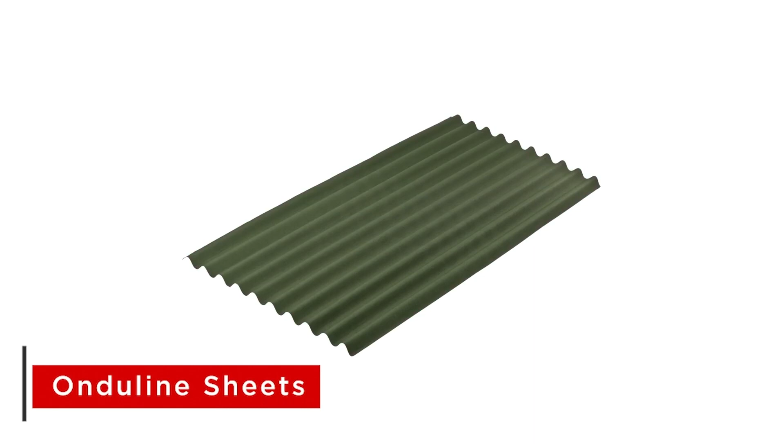Onduline sheets, made by the worldwide leader in light roofing, has been protecting lives and investments for over 75 years. Onduline is Filipinos' reliable roof partner in any season. It can withstand typhoons and wind speeds up to 260 kilometers per hour. It reduces noise on heavy rains, giving you a comfortable and quieter home, conducive for working and learning. A non-ferrous product that can resist corrosion, making it 100% rust-free.

Suitable for coastal homes and establishments. A weatherproof protection made with global standards. Uncompromised quality that values and protects your investment. Have a better sleep at night knowing that you are protected. For your roofing needs, Onduline, on duty.

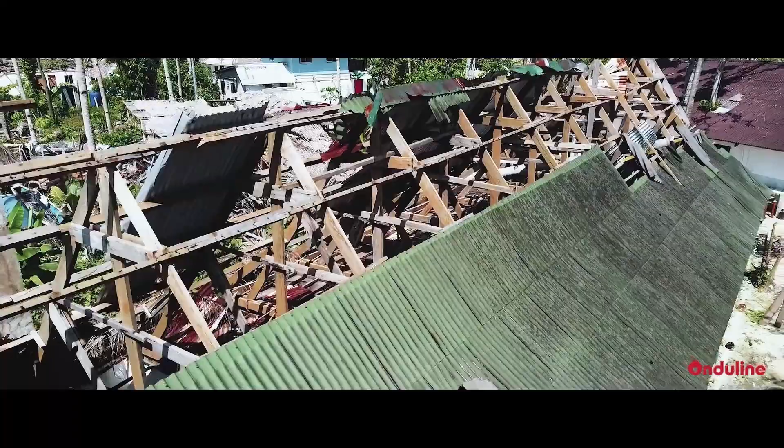And when we came back from the evacuation center, we came back here, and the only roof still alive was Onduline. So it's a no-brainer. If you want to rebuild, we go for Onduline for that.

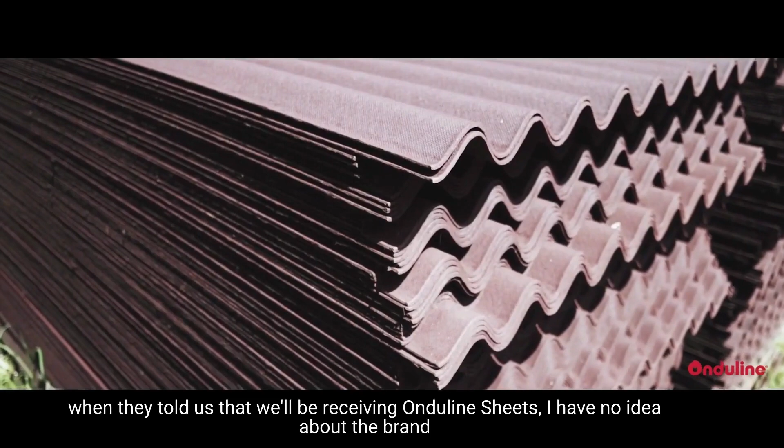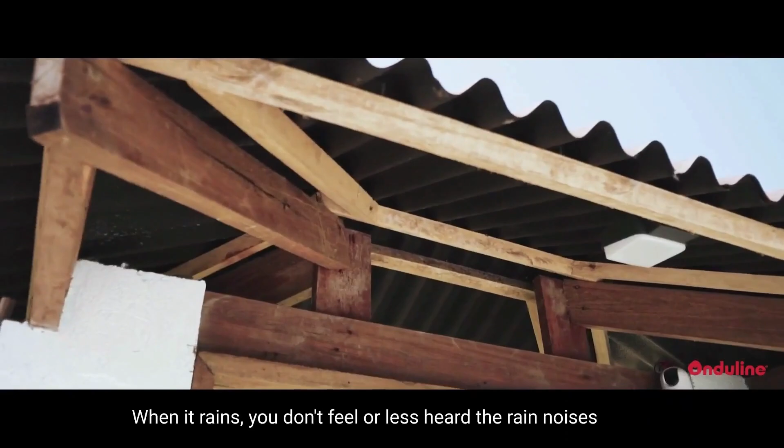It's easy to install, it's fast to install, there's no corrosion. When it rains, you don't hear the rain underneath. When it's very hot, you don't feel the heat underneath. So it has a lot of characteristics that are better than any other roof sheets.

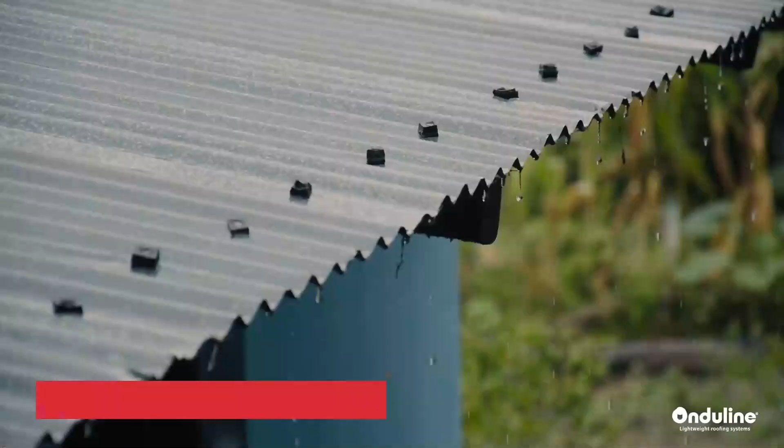Understanding the double roofing system. Water roof leaking is a very common problem in the Philippines due to its weather. Several coastal structures along a 37,000 kilometer coastline are prone to rust, and the roof material being used is mostly metal. Onduline develops a concept to address the issue of changing your whole roof after an unfortunate situation.

With this system, you don't need to dismantle your old roof that was damaged by unfortunate events. Onduline lightweight roofing solutions can be installed on top of it using the double roofing system. With its cost-efficiency, time-saving, unique, rust-free, and wind resistance features, double roofing is the expert solution. This property installed our double roofing system with less disturbance to its workers.

Upgrading your roof should not be costly with Onduline's double roofing. For your roofing needs, Onduline, on duty. Onduline Lightweight Roofing Systems. Welcome to Onduline Double Roofing instructional video using Onduline corrugated sheet. Have you heard about double roofing? Now you do. This video will give you a step-by-step on how the system works.

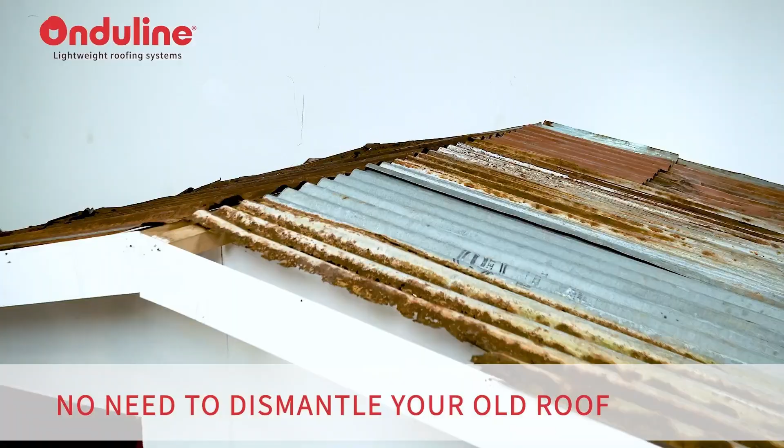Double roofing is an innovative concept that addresses the issue of changing your whole roof. With this system, you don't need to dismantle your old roof. But how does this double roofing work?

You will need the following tools: saw, electric screwdriver, measuring tape, a pen, cutter, and rivet.

Safety is essential in the workplace. A complete safety uniform is usually recommended.

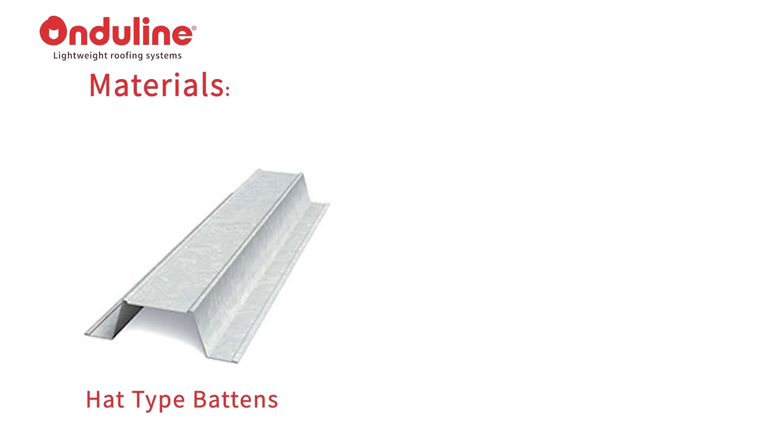Materials: hat-type battens, tech screw, Onduband, Onduline speedy screw, Onduline corrugated sheet. Secure checklist on different areas such as roof rust level, structure, purlin type, and termite penetration.

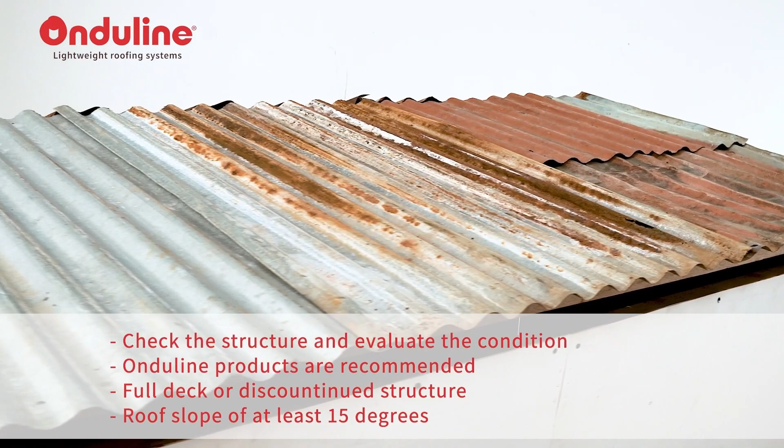How bad is the leaking? Before getting started, check the structure and evaluate the condition of the roof, trusses, and existing purlin. Onduline products are recommended for either full deck or discontinued structure, with a roof slope of at least 15 degrees.

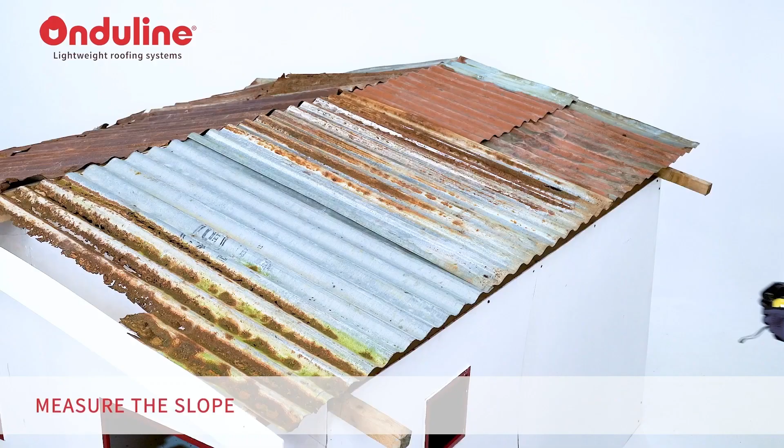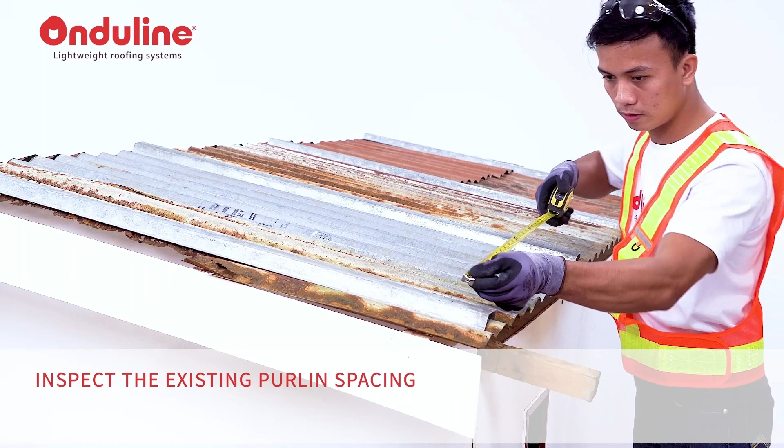Measure the slope. Inspect the existing purlin spacing. If the roof is 5 to 10 degrees, use 24 centimeter purlin spacing. If the roof is 10 degrees or above, use 45 centimeter purlin spacing.

Install main support battens vertical to existing purlins using a 2.5 size tech screw, depending on the actual existing GI profile. Use ordinary screw or verify if it's a wood or steel frame.

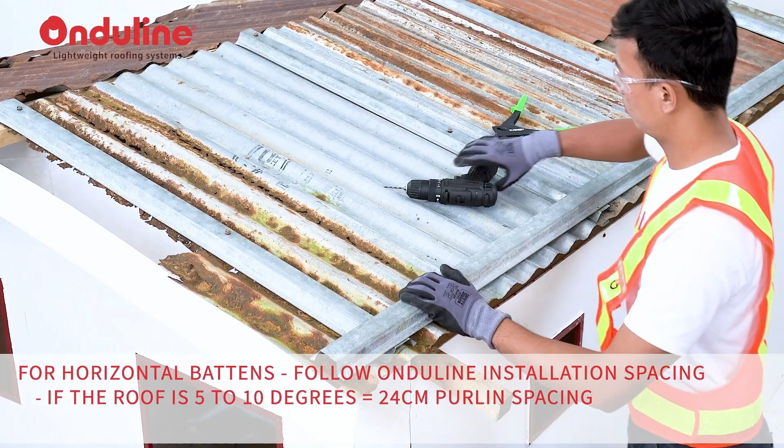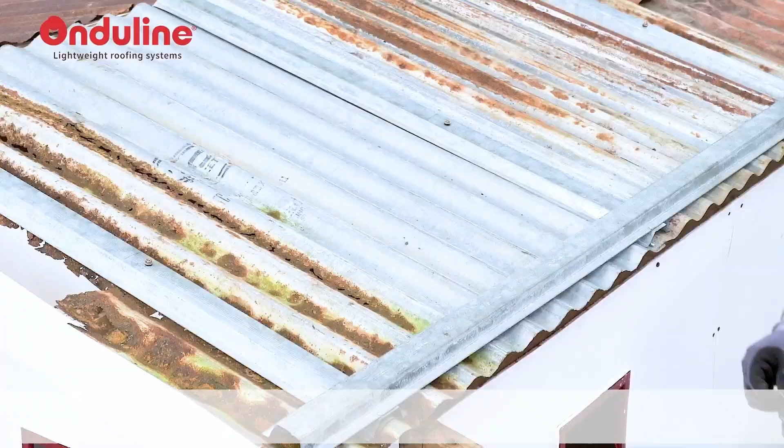For horizontal battens, if the roof is 5 to 10 degrees, use 24 cm purlin spacing. If the roof is 10 degrees or above, use 45 cm purlin spacing. Use a rivet gun to attach the horizontal battens, following Onduline installation spacing.

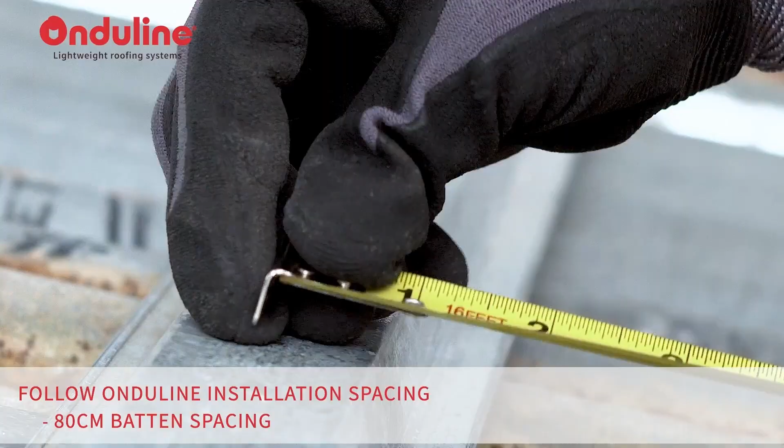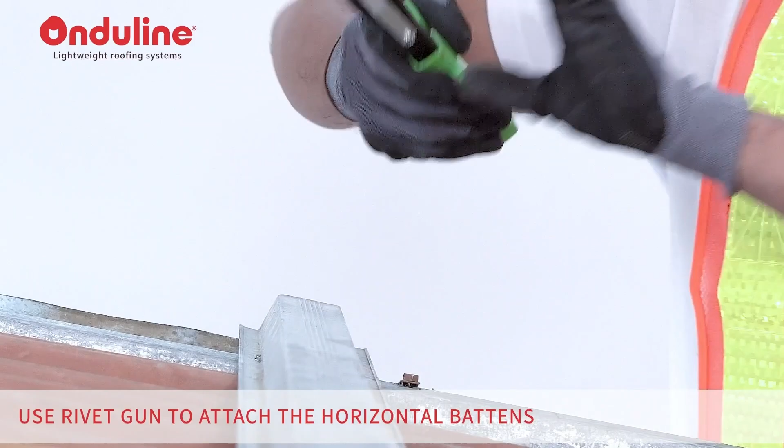Use a rivet gun to attach the horizontal battens. Start fixing the Onduline sheet.

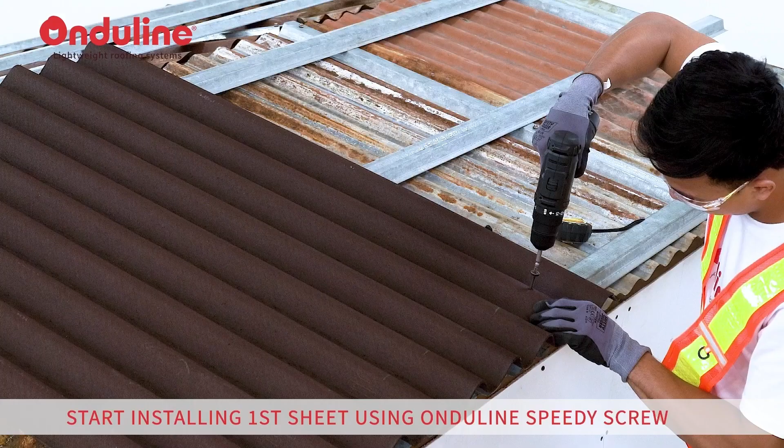Use a string line or measuring tape as a guide at a distance of 7 cm maximum overhang. Customers may opt to install rubber fillers. Start installing the first sheet using Onduline speedy screw.

For 5 to 10 degrees, or 24 cm purlin spacing, use 20 pieces of 8x4x4x4 screws. Side overlap: 2 corrugations. Top overlap: 32 cm sheets. First and second purlin spacing should be 20 centimeters.

For 10 degrees and up, use 45 cm purlin spacing and 14 pieces of 5x3x3x3 screws. Side overlap: 1 corrugation. Top overlap: 20 centimeters.

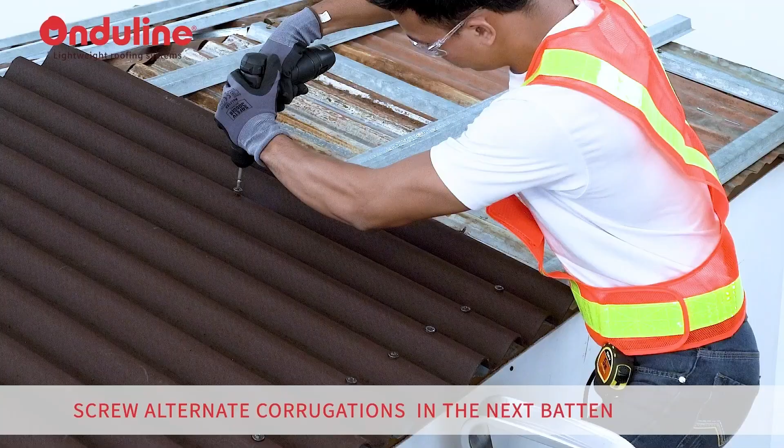Screw alternate corrugations in the next batten. Fix sheets at the opposite ends of the roof from prevailing winds.

Check side overlapping: for 5 to 10 degrees or 24 cm purlin spacing, use 20 pieces of 8x4x4x4 screws with a side overlap of 2 corrugations. For 10 degrees and up to 45 cm purlin spacing, use 14 pieces of 5x3x3x3 screws with a side overlap of 1 corrugation.

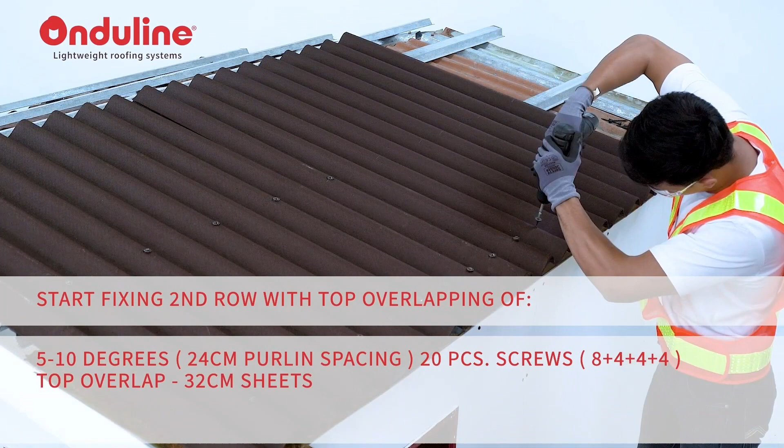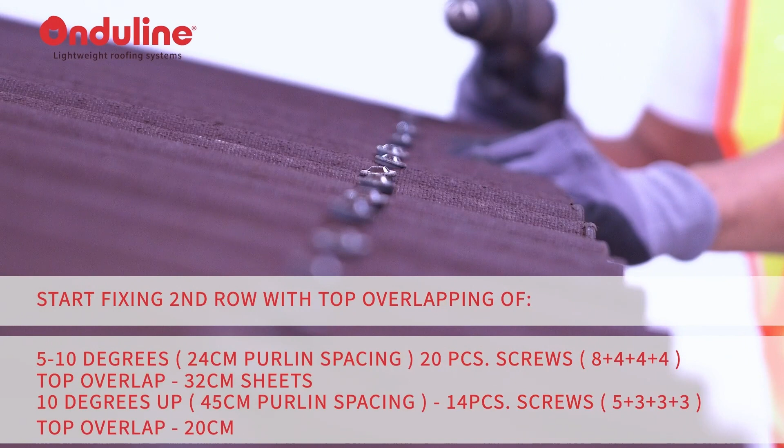Start fixing the second row with top overlapping. For 5 to 10 degrees, 24 cm purlin spacing, use 20 pieces of 8x4x4x4 screws with a top overlap of 32 cm sheets. For 10 degrees and up, or 45 cm purlin spacing, use 14 pieces of 5x3x3x3 screws with a top overlap of 20 centimeters.

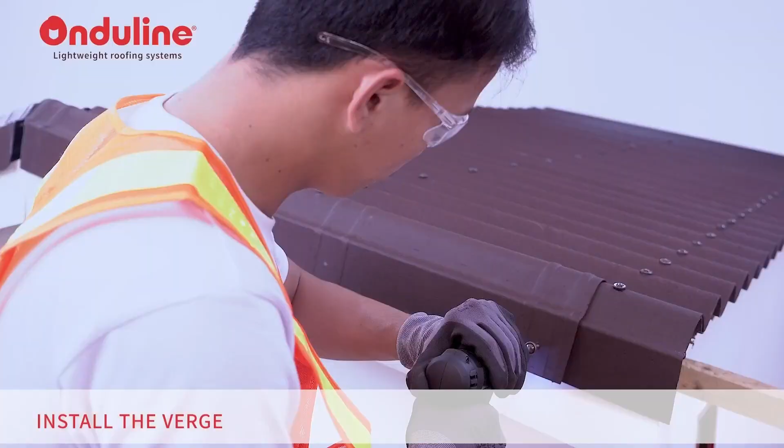Install the verge. Attach Onduband before installing the ridge.

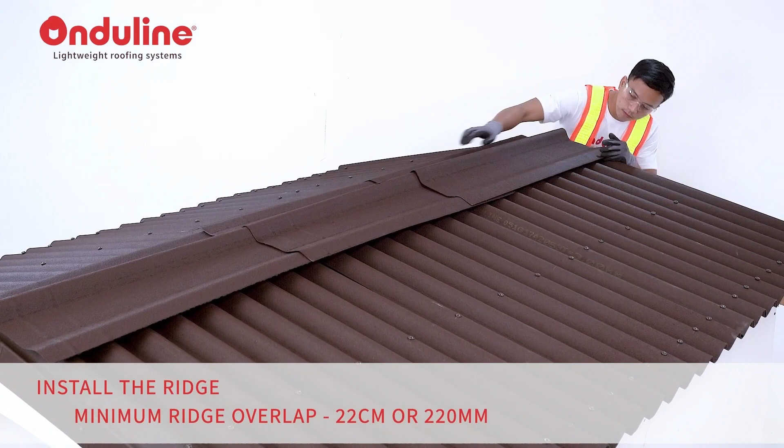Install the ridge. Minimum ridge overlap is 22 centimeters or 220 millimeters. Check for any imperfections.

That's how you easily install Onduline corrugated sheets using our double roofing system. For cost-efficiency, time-saving, unique, rust-proof, and wind resistance benefits, Double Roofing is the expert solution.

Heavy rain? Introducing Onduline's acoustic performance. With Onduline, we understand everyone's struggle, especially during rainy season. Heavy rain noise can affect your family's mood in a day. Your father can't understand what he's watching, your sister's sleep is disturbed, and you can't hear your mother's voice clearly. Onduline's lightweight roofing solutions are proven to be 4 times quieter than metal sheeting when rain falls on them, giving greater acoustic insulation performance.

With its rain noise reduction, your family can now enjoy watching TV, better sleeping, and more focus on studying. Check out our product by visiting our website.

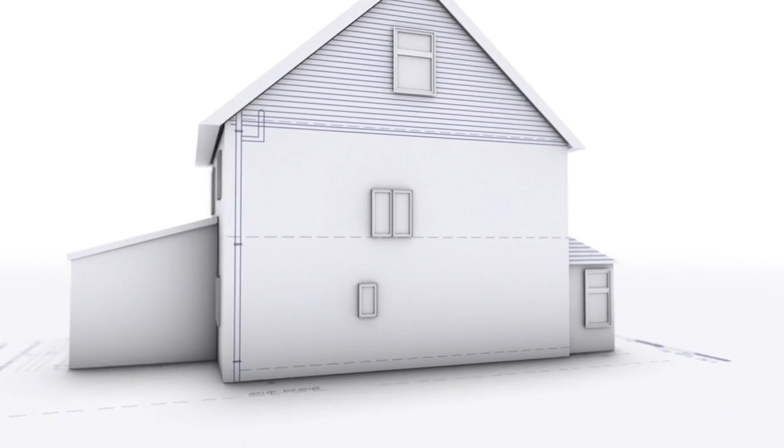When adding an extension to your home, planning is everything. It's important to consider how light will enter the space. Many people think bifold doors will bring in enough daylight, but it's often not the case. That's because an extension moves the light source further away from the original building, so daylight can't reach very far into your home.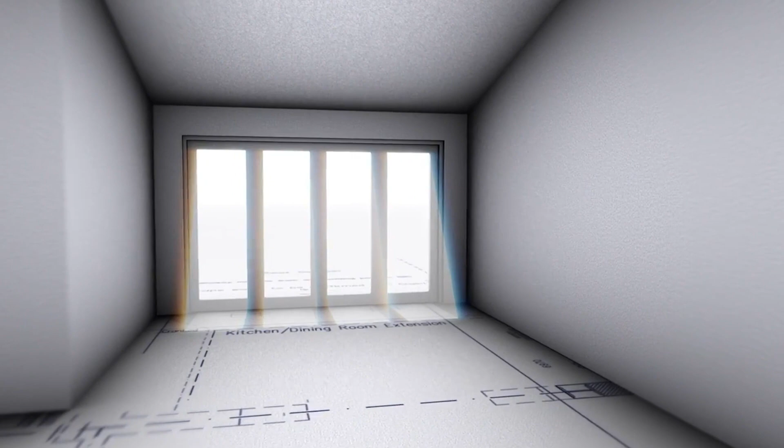The solution? Velux roof windows. They can bring in twice as much light as vertical windows of the same size, allowing light to penetrate deeper into your home. Here's an example: it's an attractive extension, but it's quite dull. Look what happens when we add 2 roof windows—the space immediately becomes brighter. But choose the optimal solution, and the room is completely transformed. It's light, bright, welcoming.

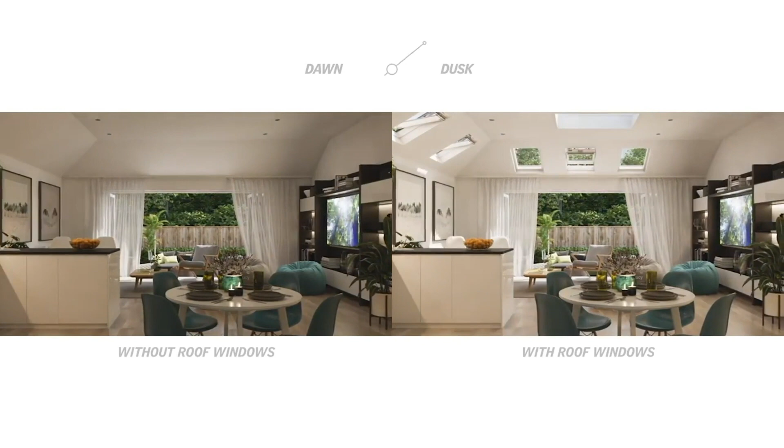Ideally, your combined roof and vertical glazing should make up the equivalent of 15 to 20% of the whole room's floor space. It's also important to think about how light will enter the space throughout the day. Get your vertical windows and Velux roof windows working together, and you'll create the optimum level of light in your extension. From dawn to dusk, they maximize the available daylight.

If your extension is north-facing, Velux roof windows are even more vital. In some cases, they're the only way to get sun shining directly into the room, like in this extension here.

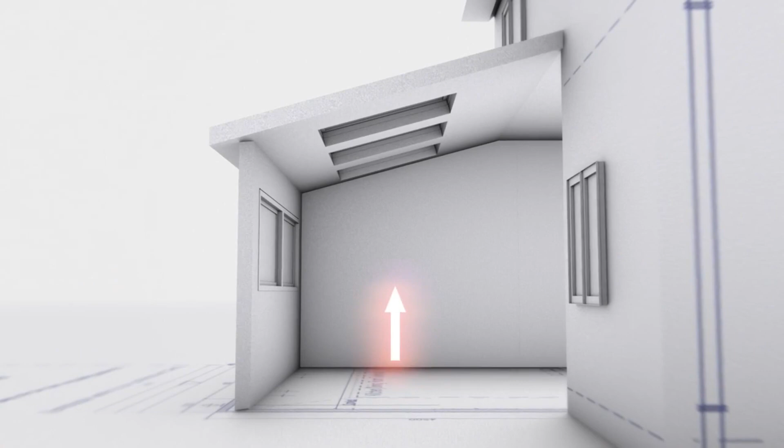But Velux roof windows aren't just about daylight. They bring fresh air into a space too, through a process called stack ventilation. As we know, heat rises, so warm air naturally moves upwards in a room.

When a vertical window is open, only a small amount of air can circulate. But add an open Velux roof window into the mix, and the flow of cool air pushes the warm air up and outwards, recycling the air in the room in seconds. Ideal for kitchen extensions, so cooking smells don't hang around.

7 out of 10 extensions don't have roof windows, so most extensions are missing out on more daylight, more fresh air, and more wow factor.

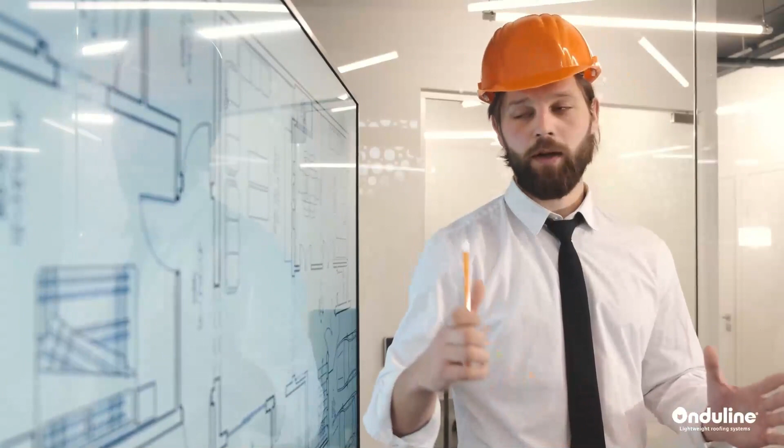Understanding the double roofing system. Water roof leaking is a very common problem in the Philippines due to its weather. Several coastal structures in a 37,000 kilometers coastline are prone to rust, and the roof material being used is mostly metal.

Onduline develops a concept to address the issue of changing your whole roof after an unfortunate situation. With this system, you don't need to dismantle your old roof that was damaged by unfortunate events. Onduline lightweight roofing solutions can be installed at the top of it using the double roofing system. With its cost-efficient, time-saving, unique, rust-free, and wind resistance, double roofing is the solution expert.

This property installed our double roofing system with less disturbance to its workers. Upgrading your roof should not be costly with Onduline's double roofing. For your roofing needs, Onduline on duty.

And now here's how to join our double roofing, doble saya. Go to the website flash on your screens or visit the Onduline Philippines Facebook page and click the link and readily provide the following information: your full name, email address, phone number, salesperson contact number, signed purchase order processed by Onduline Philippines with client and or contractor name on it, and of course provide any government ID and wait for Onduline's representative to send you an acknowledgement of your submission.

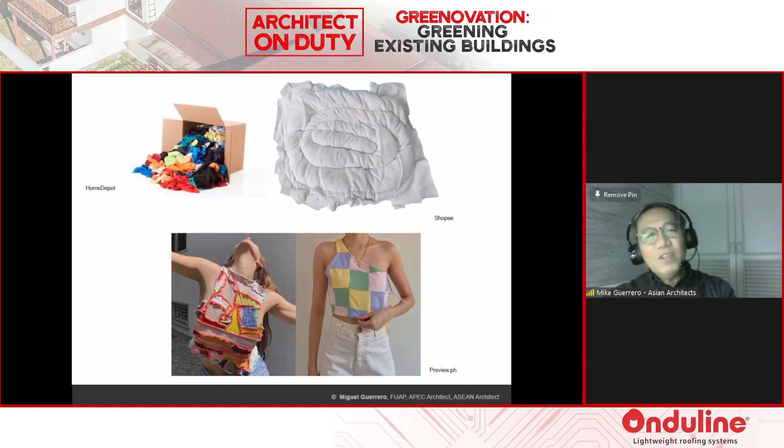And sometimes even if the clothes cease to be clothes, they're actually even recycled further. For example, they're made into rugs, sometimes even reprocessed rugs like that one little rug there, which is sewn together. And some creative people are actually putting all of these little patches together and actually creating fashion in themselves.

There's a type of fashion which, because of my generation - I belong to the older generation - I really never understood. You buy brand new pants, but they actually have holes. Every time I see some of my staff or younger people wearing them, I tell them, wow, that's cool, that's cross-ventilated pants. But even if it's already damaged, quote unquote, in the beginning, it is still recycled.

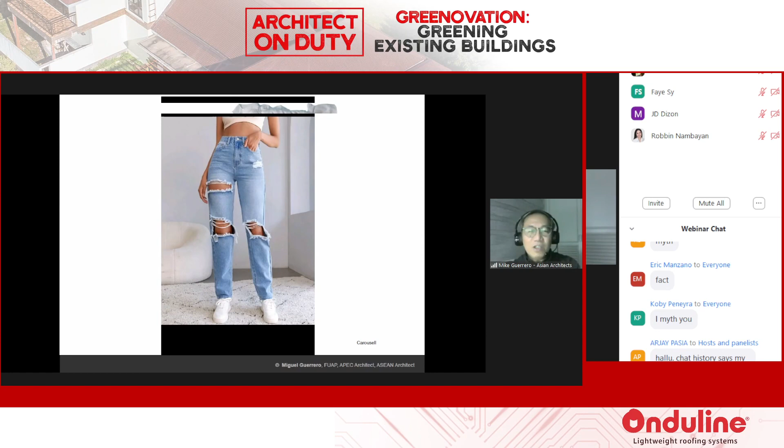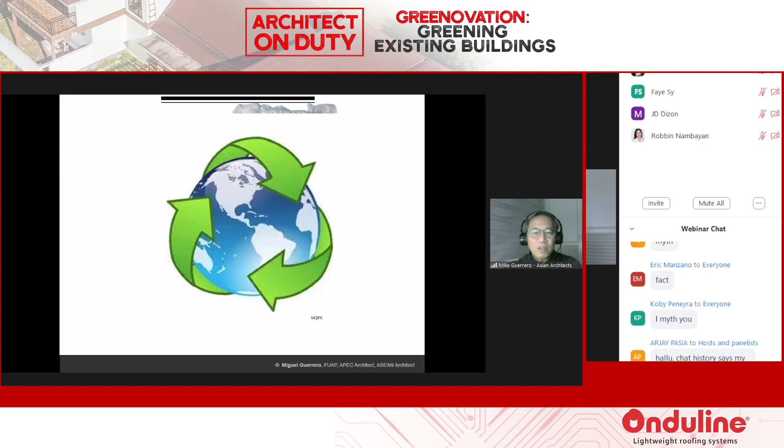So the clothing industry somehow has found a way to recycle that raw material, which is made into textile, which is made into clothes, which can be sold in different mediums, or even made into rags or trapo, etc. They have learned. Now, what about our industry?

Our industry produces buildings, homes, structures, etc. We build so many of them. Of course, the timeline is a bit longer than clothes, but then at some point, those buildings either go out of fashion, they get destroyed, they get damaged, and what are we going to do with them? Are we just going to demolish them?

The architectural industry or construction industry has created so many names for what to do with existing buildings - renovation, repurposing, adaptive reuse, etc. I thought that's a bit confusing for the public, so I decided to restructure what to do with existing buildings in terms of its function.

So there are four possibilities. If you have an existing building, one, you can extend the use of the building - repair, restore, conserve. In other words, if the building is working this way, we just make sure that we constantly keep it in good use, in good repair, so that it can actually continue being used for what it is originally used for.

Second, we can upgrade that building. Maybe the technology is already so old, so maybe we start renovating, retrofitting, remodeling that building so that it sort of keeps up with the times, it keeps up with technology.

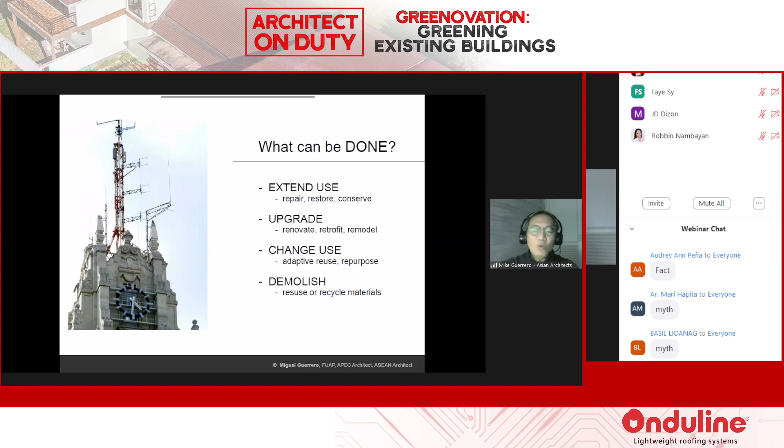We could also change the use of the building. If the building is an office building, can we reuse it as a school building? If it is a warehouse, can we make it a hotel? So that's adaptive reuse or repurposing.

And if really the building cannot be saved, then we are forced to demolish the building. But try to see if you can actually reuse or recycle the materials in that building.

So today, we go to three points I'll share with you. First step is the assessment. In other words, when you have an existing building, before you touch it, before you modify it, you have to assess that building - get details, get data, get information, which will determine whether you can actually proceed with the renovation or not.

Second is greenovation. I'm going to share with you six steps in which you can actually go through so that you can change that building which you're trying to touch or renovate into a green building. If you're going to touch a building, why don't you make it a green building anyway?

And third, design tips. Having gone through the process of renovation or greenovation, what would you do?

And what could you learn from that process so that when you design from the very beginning, we actually design to facilitate the renovation or retrofitting of that building in the future.

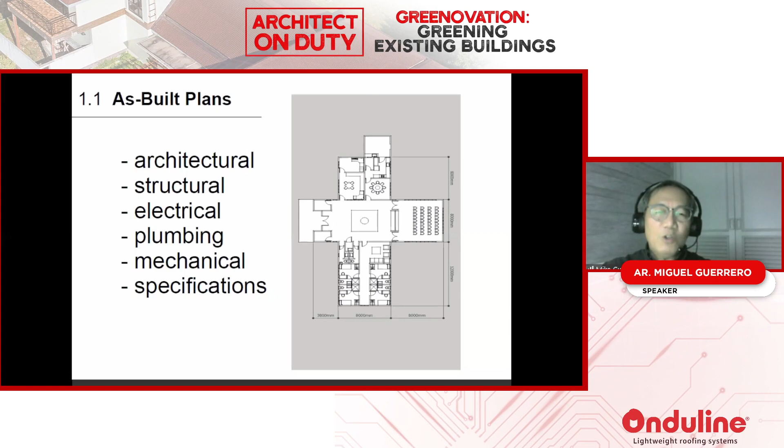Now sometimes these are not accurate, or for some strange reason the plans don't exist. Then you will have to actually do your best to measure up the building, try to check out all the items in it, and make or create the plan so you can use those plans to start your renovation process.

Second is an energy and cost audit. Ask for the building's electrical consumption, get the Meralco bill, find out the monthly consumption of electricity in this building and the equivalent cost. Second, ask for the water bill, check the water consumption and cost of this building. Third, what is the cost of maintenance of the equipment? The air cons, the elevators, everything—try to find out how much they are spending per year to maintain this equipment.

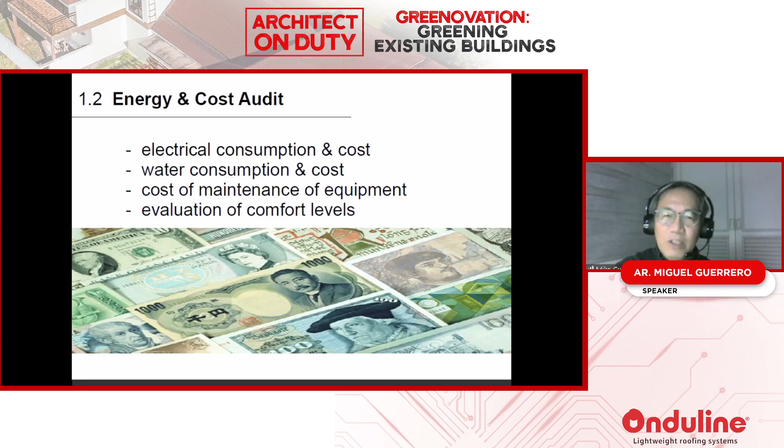And then evaluate the comfort levels. You can pass around a little survey or ask people how comfortable they are in the areas where they work or live, depending on the type of building you're going to renovate. This is important because it becomes a benchmark which in the future can determine whether it is worthwhile renovating the building based on these parameters or not.

The third step is doing a building survey. So we go there and check the building. First, climate and site data: where is the orientation of the building, where is north, south, east, west? What is the average temperature, the mean temperature, the highs and lows? Rainfall in the area of that building.

This will help you if you want to decide to harvest rainwater. Wind speed and direction, so you might be able to use this wind to flush out the air inside the building. The topography within the grounds of the building, or even around the building, so at least you know which is the high point, which is the low point, where the water is going to move in case there's a typhoon.

Air quality, parts per million—is it polluted or is it safe? The noise, decibel level in the area, vegetation around if existing, and matters like wind affected by adjacent buildings. Because even if there's a certain direction of wind, if there's a building beside it, the wind can actually be deflected by that building.

Then review the building form. What is the surface to volume ratio? In other words, what is the skin of the building? Because if you're going to change the finishes of the building, you have to consider that. What is the glazing ratio? This is known as the percentage of windows to wall, the window-wall ratio in the building. And then, of course, building orientation.

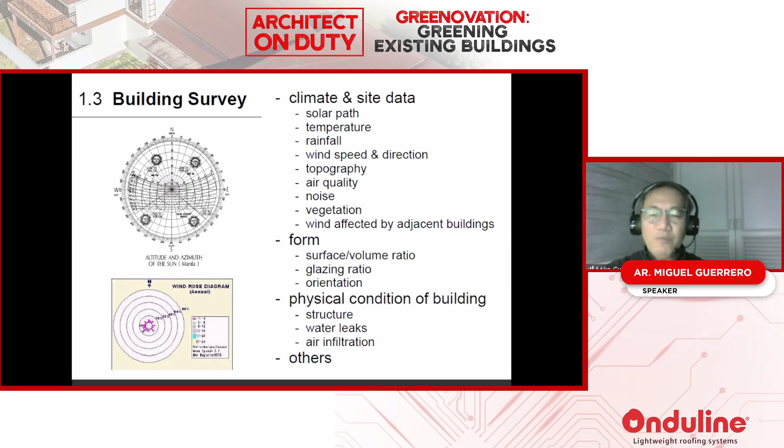Where is it facing? And then finally, check the physical condition of the buildings. How is the structure, is it safe? Are there water leaks, are there air leaks? In other words, maybe it's aircon, but the aircon is actually leaking out of the windows or the doors, or even cracks in the walls, and others, depending on the type of building you're going to renovate.

Fourth is equipment survey. Start reviewing the equipment, check the conditions of the air conditioners, pumps, elevators, escalators, fans, blowers, electrical panels, wires, controls, and others.

Now, don't get shocked, you're not going to do all of this because as an architect, we are not experts in some of these matters. We put together our team of engineers, our electrical engineer, our structural engineer, our plumbing engineer, and they join us to survey the equipment in that building.

Once you've done that, you will be faced with some issues to help you decide whether you should retrofit or not. So why should you retrofit? Is the building decaying? Is it degraded? Maybe it's time to renovate the building.

Is it outdated? Be careful about outdated, because sometimes some buildings are actually classified as historical monuments. You have to be careful about that.

Is the building inefficient in terms of its energy usage, its water usage, its space usage? Is it unreliable? Is it unhealthy? Are people getting sick there? Is it too dark? Is there going to be a change of occupant? Is the building operating at excessive cost?

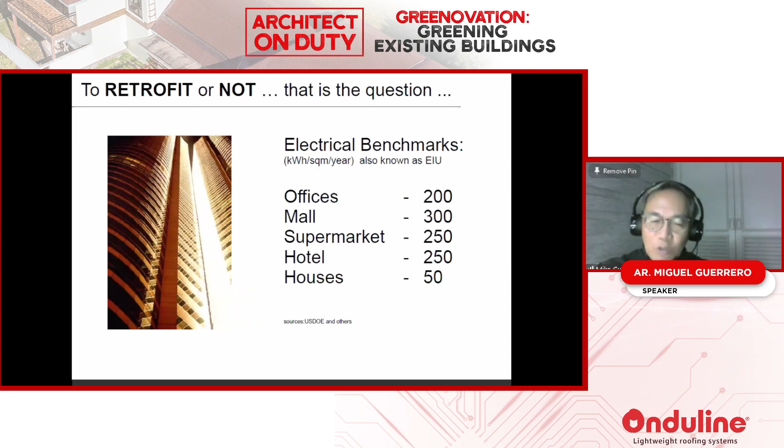Now that I mentioned houses, maybe later on you can do a little homework. When you go home, try to see, get your own Meralco bill. Try to find out what is the kilowatt hours per year, and what is the area of your house. Divide it and see, are you going to be above 50 or below 50? If you're going to be above 50, it means maybe your house is not that energy efficient and you have to look into it. Of course, if it's below 50, congratulations.

Now, what is the advantage of retrofitting? First of all, it's much, much lower capital cost than building a new building. It has a shorter time for completion because even in the most extreme case of retrofitting, which means taking out all the walls, all the windows, all the electrical, all the plumbing, and you just leave practically the building structure, which is the columns, the beams, and the slabs, you're actually starting already with a structure. That's why the time to complete that building is going to be much shorter.

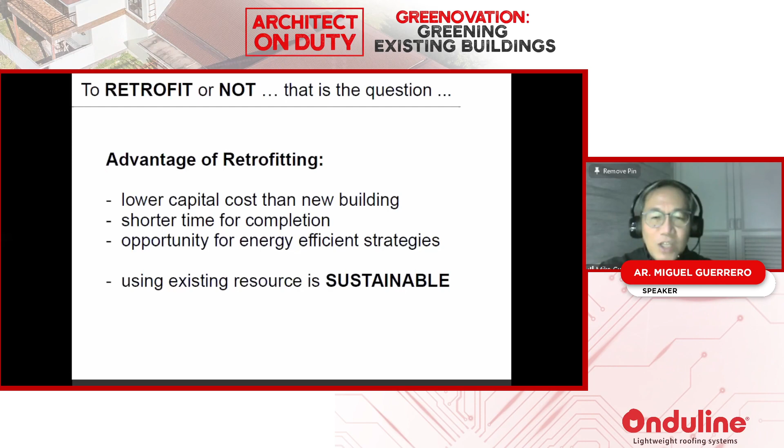And of course, if you're going to touch the building, there's an opportunity for energy efficient strategies. And when green people come together, they always say using an existing resource is sustainable. Because what is sustainability? It's maximizing efficiency of all our resources in the world. And therefore, if a resource is existing and we're using it, then that is a direction towards sustainability.

Now, we don't have to retrofit the whole building in one go. There are retrofitting strategies. One retrofitting strategy is building element life cycles. For example, don't change the air conditioner if it is still running perfectly. Phase it at the end of life of that air conditioner. When that air conditioner is already old and run down, then maybe it's time to change that. So it depends on the life cycle.

You can also retrofit by scale of intervention. For example, you could change just all the lighting. If it is still halogen lights, or maybe you're using CFL, it might be time to move into LED.

Scale of intervention - you can replace the whole air conditioning system, or you can opt to do what I call retrofit packages. For example, one area of the building is very hot, so you look at that whole package. How do you make it more comfortable in that area? Maybe it needs an air conditioning upgrade, maybe you need solar heat control. Look at that solution so that you solve that particular problem in that area. That's what I call a retrofit package.

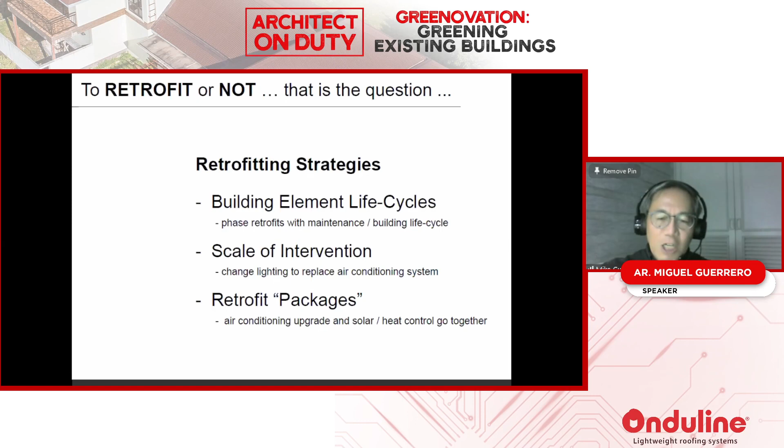So retrofitting doesn't have to be the whole building. It could be based on the building element life cycle, it could be based on the scale of intervention, or it could be based on retrofitting packages.

So let's assume that after you did all your homework and realize okay, this building we can renovate. There are 6 stages in which we can actually address this issue.

First, the building envelope and fenestration - work on that building envelope because that is what controls everything inside. Next, work on the air conditioning and ventilation. Why number 2? Because air conditioning in a normal office building consumes approximately 60% of your electricity. Number 3, lighting - this will consume 20% of the electricity of a typical building. Then look at water, then look at the materials, and then look at the possibility of introducing renewable energy.

So how do you do renovation? First of all, it's not one man's job. You have to put together all your engineers, even the contractors, so that you can discuss. Remember, whenever you start renovating, there are many surprises - I have gone through that many times. Always have an allowance. Tell the owner to have an allowance for things which might pop up in the middle of construction. So get your team together - the owner, the engineers, the designers, even the contractors.

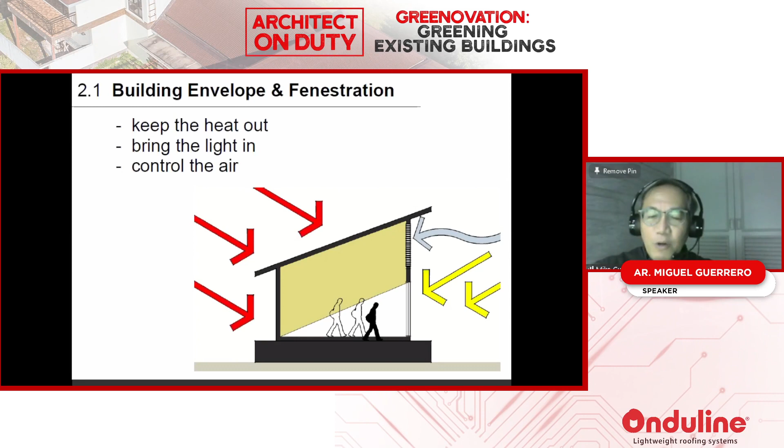So first, the building envelope. What is the function of the building envelope? Keep the heat out, bring the light in, and control the air. That's the function of that building, and therefore we have to study each and every part of those aspects in the building.

For example, if the building is very hot and you have a window facing west - let's assume this is west - you can imagine the sun goes right through this glass window and brings in direct heat into this room. It becomes very hot and uncomfortable for the people, so they use a very powerful air conditioner. What can you do? First, can you put a vertical sunshade outside that window so that it's not hit directly by the sun? It's already shaded.

Can we change the color of this wall to a lighter color? Dark colors absorb heat, lighter colors reject heat. Then the roof is actually hit by the sun, so insulate that roof deck. Earlier in the Onduline videos, you can actually have a double roof - if you have a roof deck, you can put a secondary roof there so that the sun hits that roof first. It may heat up the air inside, but it will no longer transmit heat into the slab or original roof, keeping the interior much cooler.

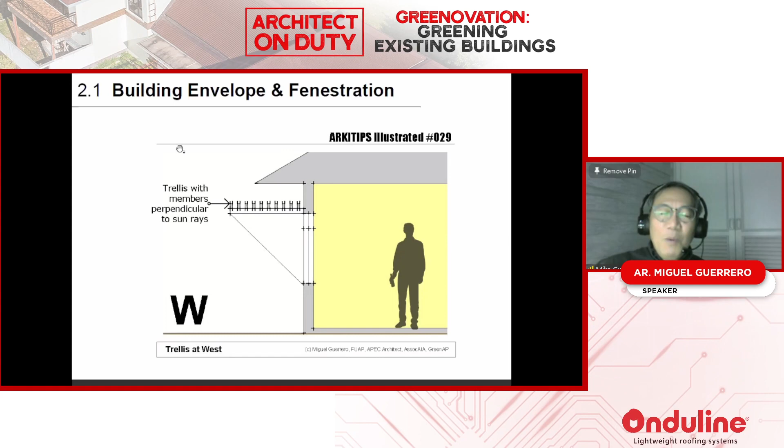What if you have a window facing west, but you have a fantastic sunset view of the sea? I said the other option is to do a trellis solution. In other words, when the sun is low, it will actually be blocked by the trellis, but you'll still have a view of the sunset. So just be creative.

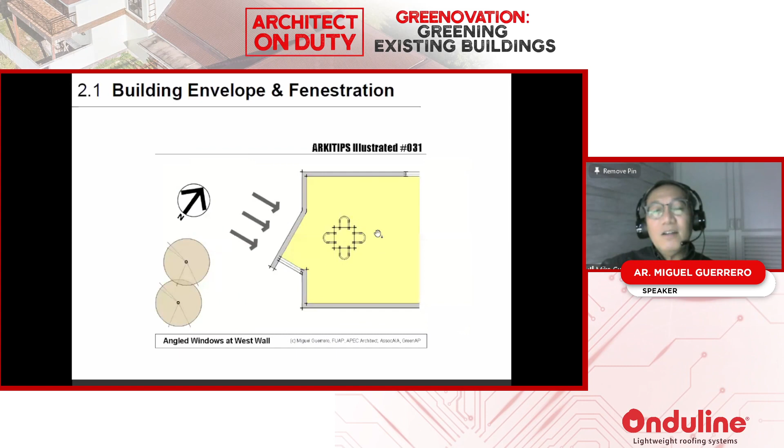In terms of floor plan, if you have your building and west is here, and you put a window there, you're going to have a lot of hot sun coming in. So there's an alternative: push that wall out and put slit windows, maybe floor to ceiling, facing north to south. This room will have lots of natural light without the heat and direct sunlight. If the sun comes at an angle, you can do the same principle, push it out a bit.

Now, air conditioning. When you review air conditioning, first check preventive maintenance, because look at this ducting. The old type of air conditioning was transmitted by ducting, and many times these ductings, especially the joints, have a lot of leaks. So if you're going to retain the existing aircon, try to look into those ducts and make sure there are no leaks.

Next, zone usage. This is very important. If you're going to replan the building, study which parts or functions of the building will need aircon 24 hours, which parts will need it only during the day, which will need it only during the night, etc. If you can do that, you can cluster the areas that use aircon 24 hours into one zone, so they only use that aircon for that area.

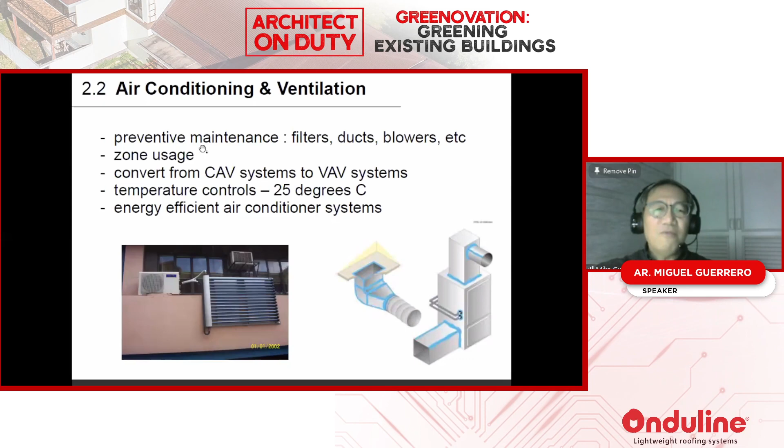And maybe another zone for rooms which only use the aircon during the day, so the aircon will be on only during the day for that area. This saves energy. And of course, look for energy efficient air conditioning systems.

Ceiling fans are becoming very popular. You have these slow moving big air fans which move volumes of air and use very little electricity. Even if you have a smaller, lower powered aircon, it evens out the temperature in the room. So let's look into that first, and see if you can use a combination of fans with air conditioners.

At the same time, try to see if there's a way to bring in some fresh air. That's why earlier I said study the wind movement around the building, so maybe you can have an inlet and an outlet. Try to capture air from the outside, fresh air, at a point where you do not bring in pollution.

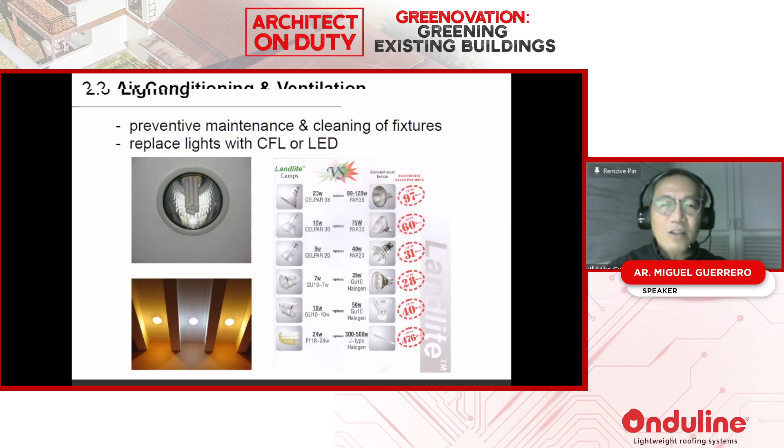Looking at lighting, again, preventive maintenance and cleaning of fixtures, because sometimes the fixtures are just dirty. Try to see how you can do that, and replace lights with CFL or LED. Another small detail, becoming more popular, is to replace switches with motion sensor switches, especially in corridors and storage rooms, so people don't forget to turn off the lights. Also consider the control of lighting, look at this little picture here.

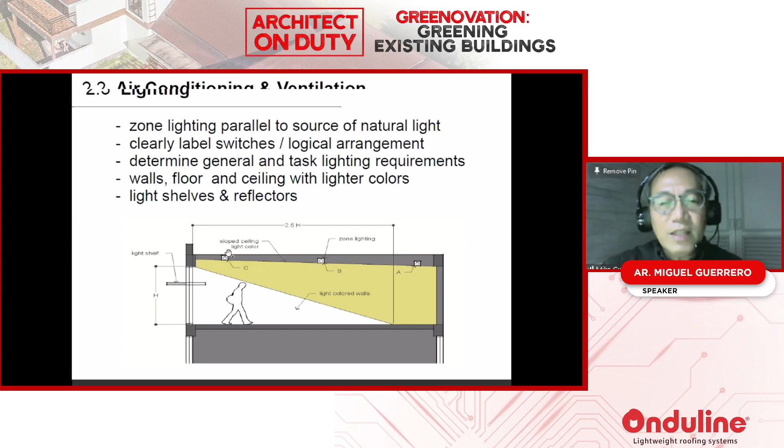You have a window and lights inside the room. Do you think the light beside the window needs to be turned on during the day when you have ample light? Of course not. That's a waste of electricity. Whereas the light farthest from the window probably needs to be on the whole day. So organize your switches based on distance from the window. Lights beside the window should have a separate switch from those farther away, so during the day only the far set is on, and at night you start turning on those closer to the window.

Water study: is it possible to harvest rainwater? No matter how small, you don't have to use it for the whole building, but for selected uses like flushing, cleaning the grounds, or irrigation. At least you save in terms of freshwater supply.

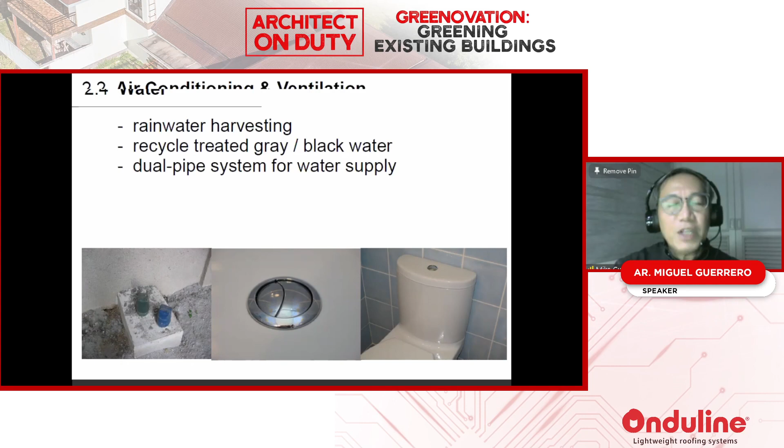Many new buildings now require STPs, so we can reuse the STP water for other non-potable uses in the building.

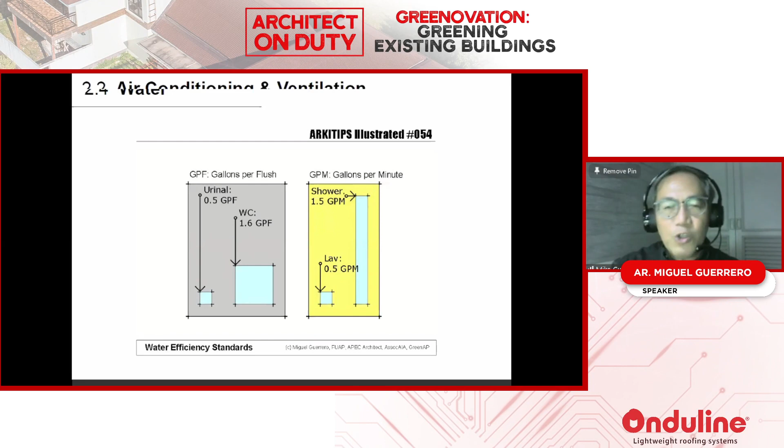Study the fixtures which use the least water. For example, urinals should have no more than 0.5 gallons per flush, water closets no more than 1.6 gallons per flush. For showers and lavatories, look at gallons per minute: lavatory 0.5 gallons per minute, shower 1.5 gallons per minute. Look at the specs of the fixtures you specify and choose those that meet these levels.

Outside the building, you always have catch basins for storm runoff from the downspouts. It goes to the storm drain, into a catch basin, and all the way down to the street, bringing water as quickly and efficiently as possible to the street. The street leads to the lowest portion of the city, causing floods.

A little detail I've done in some renovated projects is to break the floor of the catch basin down to a gravel base. As the water runs through the pipe and lands in the catch basin, a portion ends up going into the ground, bringing less water into the next catch basin.

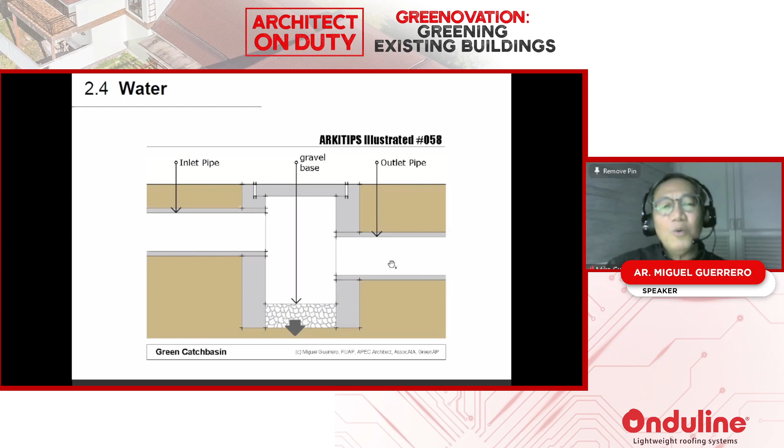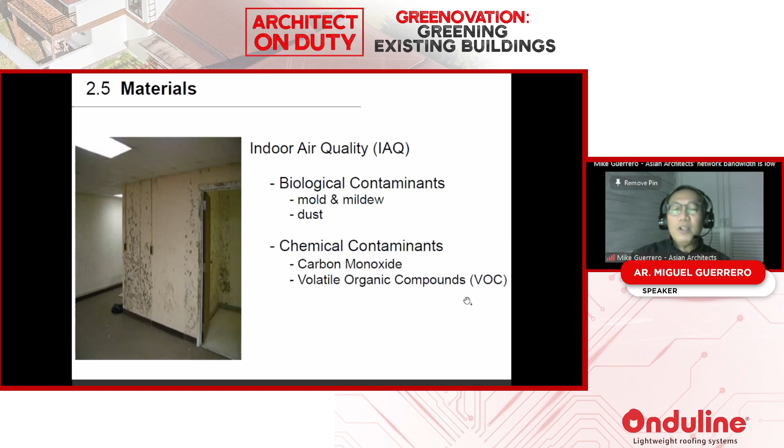You can also look at materials. If you look at this picture, it's nakakadiri -- so much mold, it looks sick actually. So look at materials in which we can avoid biological contaminants. When choosing materials, especially paints and other chemicals, look at VOC, volatile organic compounds, because these can cause sicknesses inside the building.

Look at indoor environmental quality in materials. Check: are the people comfortable? Is it quiet enough for the task they're doing? Is the lighting adequate? And is the indoor air quality clean and less polluted?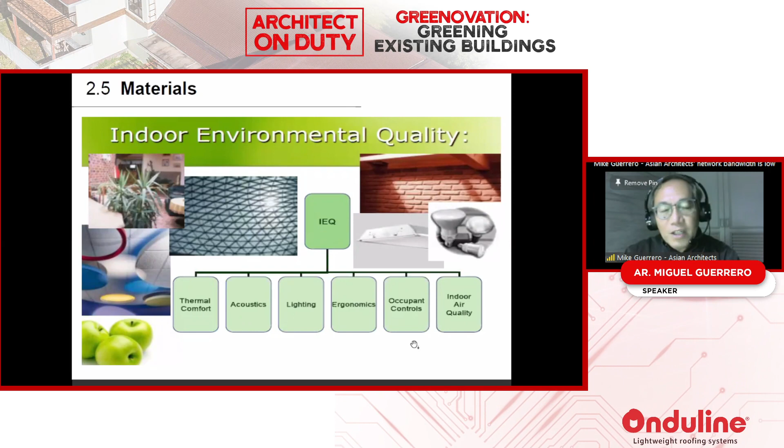Finally, look at possible renewable energy. Solar panels are getting cheaper and cheaper. You don't have to power your whole building with solar panels, but maybe put a few to power lights that are probably on the whole day, like those in the fire escape, which can be tapped to a separate solar panel.

So let's look at design tips. If you were going the other way around, now that we understand how complicated it is to renovate or greenovate a building, what would you do if designing the building from the start, keeping in mind that one day it may be renovated? Consider building envelope, orientation, windows, and pipe chases. The building form should make sure the person inside is comfortable despite variable exterior environments -- hot, raining, cold, etc. -- and we design the envelope to address that.

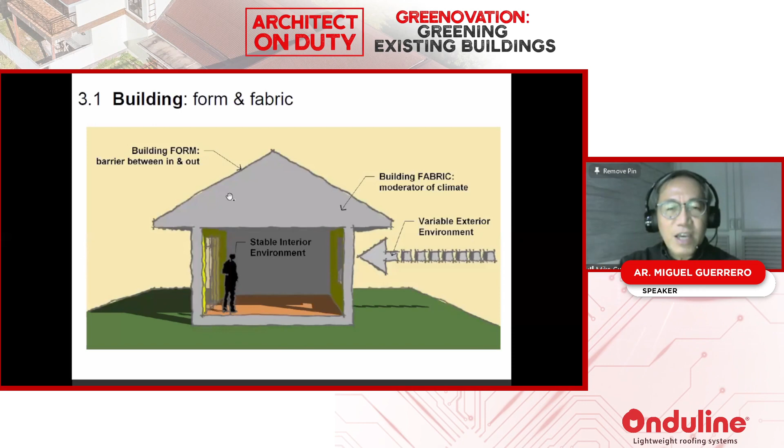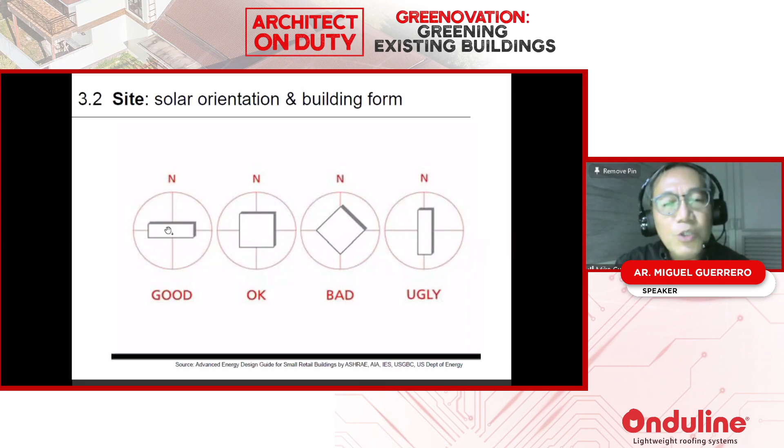In other words, the hot part is putting windows. If north is here, put large windows on the north. If possible, vertical fins on the east and west. And of course, if you have windows to the south, make sure you have a media agua overhang.

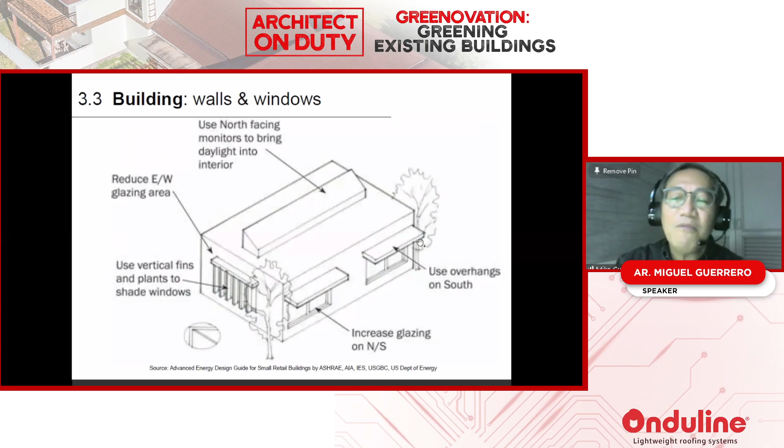So to recap, before you touch any building, do an assessment. Make sure you get the as-built plans, do an energy audit, a building survey, an equipment survey, and this assessment will lead you to make that decision with the owner whether that building can be renovated or not. Then, if it is a go, we can go into the renovation process.

First, look at the building envelope with fenestration, avoid heat, bring in natural light, bring in natural air. Look at air conditioning, energy efficiency of air conditioning, energy efficient lighting. Look at water, if you can recycle water, if you can harvest rainwater. Look at materials, the health and indoor air quality. And then finally, look at possibilities of adding renewable energy.

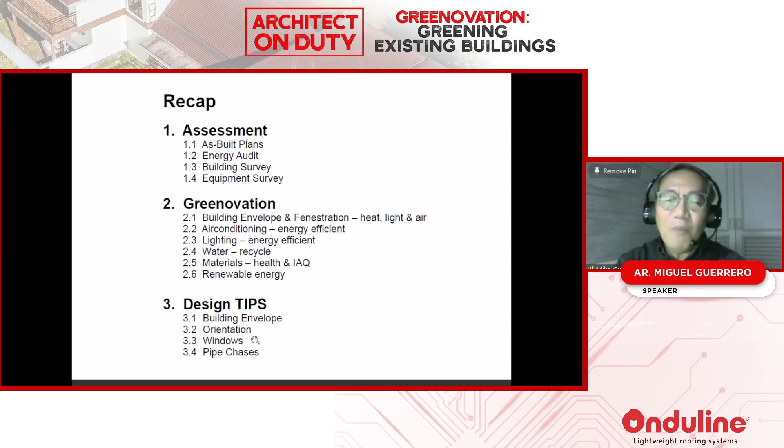And finally, if we're going to design new buildings, let's look at the building envelope, its proper orientation, location of windows, and most importantly, pipe chases.

And what did we do? First of all, I got a structural engineer to check the building. We brought in the electrical and plumbing guys to check the building also. There were no as-built plans because it was repossessed—I think the owner must have gotten so pissed off that he probably did not submit the plans. So we had to get somebody to actually measure up the whole building and create the as-built plans.

And now, some strategies. What I did was create lots of pipe chases. And since there's a bathroom in the middle, I punctured a hole, a shaft from the top roof deck all the way down to the lowest floor, which meant that the bathroom had all natural ventilation, and that's where I passed all the new pipes.

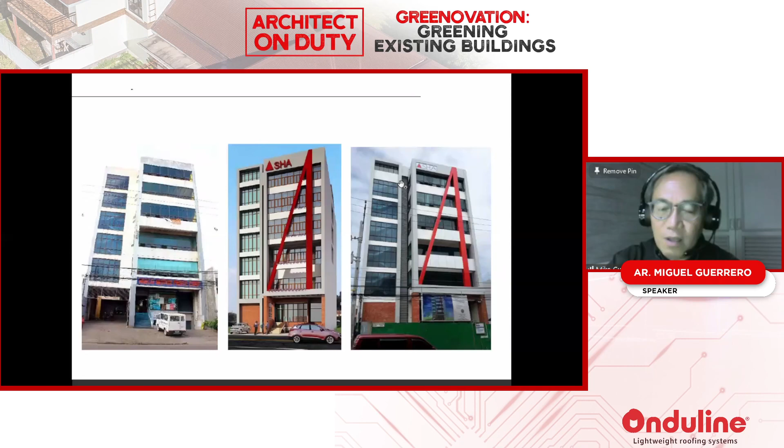So with that, I'd like to end with this little thought: there are more buildings existing than those being designed. Retrofitting these existing buildings for greenovation promises to be a big market for green architects.

Many of us dream of putting up new buildings. Yes, it is nice to have new buildings, and it is easier to actually put up new buildings. But those new buildings are not as many as the existing buildings. And therefore, if we are willing to embrace and understand the process of how to retrofit a building to make it even green, then we're going to be entering one of the bigger markets for green architects.

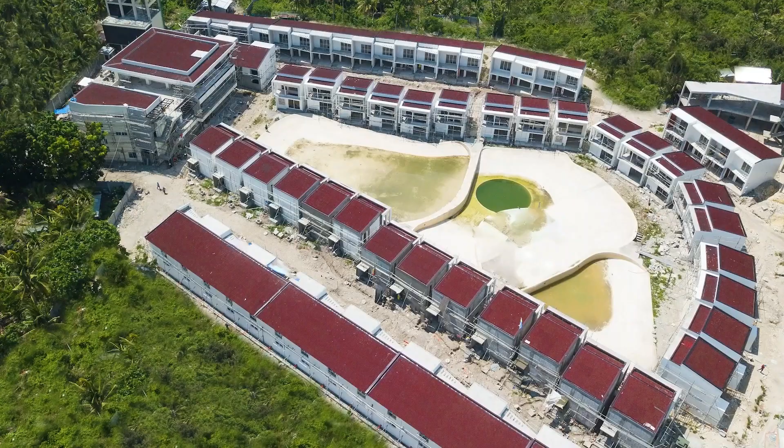Times like these, we need to stay at home under one reliable roof that will protect you and your family, a shield that values your business. Onduline sheets, made by the worldwide leader in light roofing, has been protecting lives and investments for over 75 years. Onduline is Filipinos' reliable roof partner in any season. It can withstand typhoons and wind speeds up to 260 kilometers per hour. It reduces noise on heavy rains, giving you a comfortable and quieter home, conducive for working and learning. A non-ferrous product that can resist corrosion, making it 100% rust-free, suitable for coastal homes and establishments. A weatherproof protection made with global standards, uncompromised quality that values and protects your investment. Have a better sleep at night knowing that you are protected. For your roofing needs, Onduline, on duty.